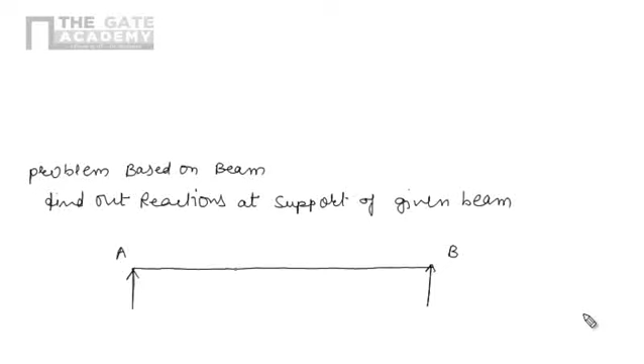In the problem, a simply supported beam AB is given, where at A and B we are having two simple supports, and it is subjected to a uniformly distributed load over a length of 2 meters, with an intensity of 500 Newton per meter, and we are having 2 point loads. The values of these 2 point loads are 500 Newton and 1000 Newton, and this distance is 2 meter, and this distance is also 2 meter.

So let's take this point as C and this point as D. Now we are interested in reactions at A and B.

Before starting this problem for finding out reaction, first identify the supports. Support at A and B, if we look at the diagram, are simple supports, and according to our theory, a simple support has only one reaction. So for this problem, there will be one reaction in the vertical direction at each, which we call Ra at A and Rb at B. So now our interest is to find Ra and Rb.

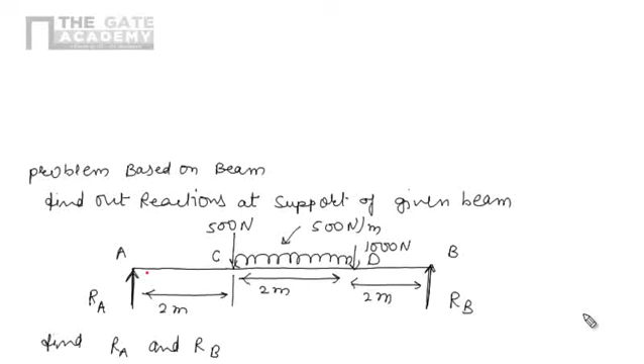If we look at this system, the beam is carrying a uniformly distributed load as well as point loads, and it is in equilibrium, so we can apply the conditions of equilibrium.

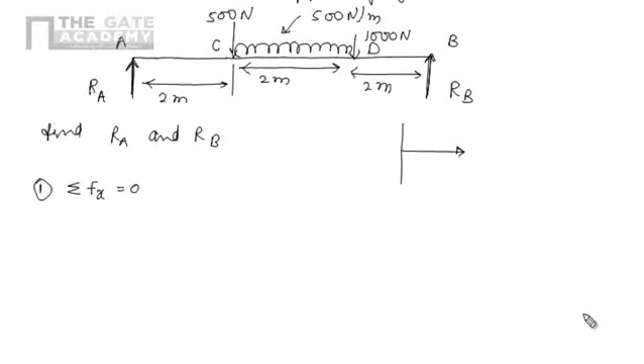The first condition of equilibrium is that the algebraic summation of all horizontal forces should be zero. According to our sign convention, positive x is positive, negative x is negative, positive y is positive, and negative y is negative. At A there are no horizontal forces, at C, D and B there are no horizontal forces, so there is no need of applying the first equation.

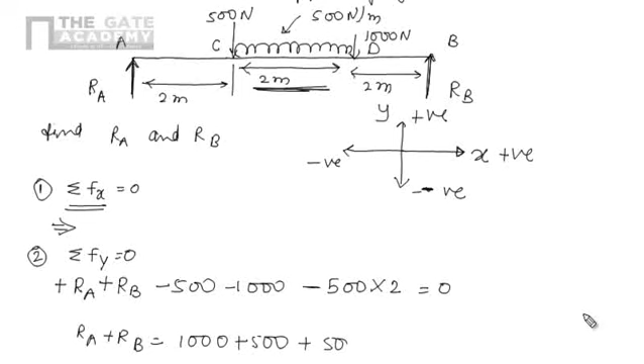Second equation: algebraic summation of all vertical forces should be 0. In vertical direction we have Ra in positive direction, Rb also in positive y direction, a 500 Newton point load downward so minus 500, a 1000 Newton point load downward so minus 1000, and a uniformly distributed load of intensity 500 Newton per meter over a span of 2 meters, acting downward, so negative. This gives Ra plus Rb equals 1000 plus 500 plus 500 into 2, so Ra plus Rb equals 2500.

So we are having two unknowns, and one more equation is needed. We can use condition number 3: algebraic summation of moments of all forces about A should be 0.

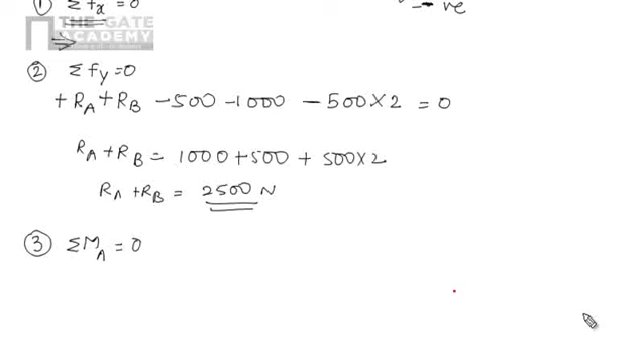Due to Ra, the moment at A will be 0 because the perpendicular distance is 0, so Ra into 0. For the 500 Newton load, the perpendicular distance is 2 meters, so the moment is 500 into 2. Since we are dealing with a vector quantity, our sign convention is that clockwise moment is positive and anti-clockwise moment is negative. This 500 Newton load causes a clockwise moment, so it is 500 into 2, positive.

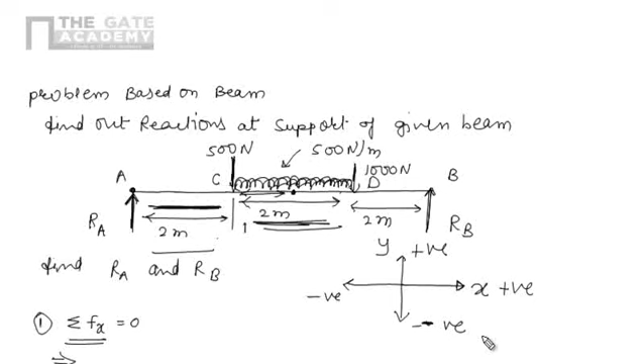Similarly, for the 1000 Newton point load, the distance is 2 plus 2, that is 4, so it is 1000 into 4, again clockwise so positive. For the uniformly distributed load, the total loading is 500 into 2, and it acts at the center of gravity. The distance from C to this CG is 1 meter, so the total distance from A is 1 plus 2, that is 3. So it is 3, and again the moment is clockwise, so positive, equals to 0.

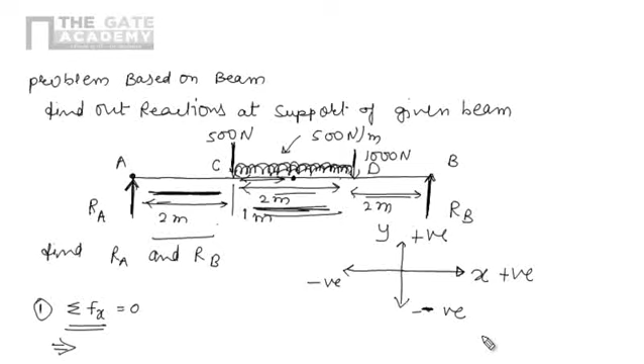And one more moment we have to see, that is due to RB. RB into 2 plus 2 plus 2, that is 6. So we can take this RB into 6.

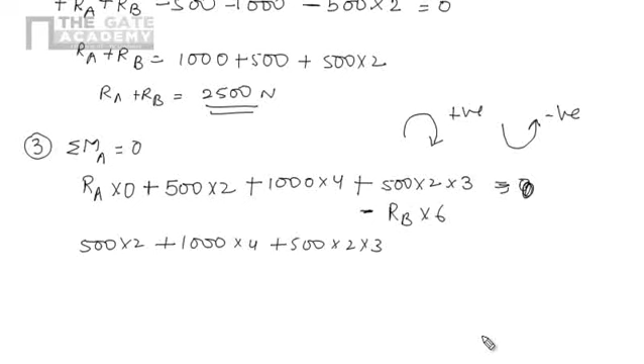RB into 6 is in clockwise direction, and now we have to equate it with zero. So now again I am writing this equation: 500 into 2 plus 1000 into 4 plus 500 into 2 into 3. These are clockwise moments, and this anti-clockwise moment due to RB into 6 equals to zero.

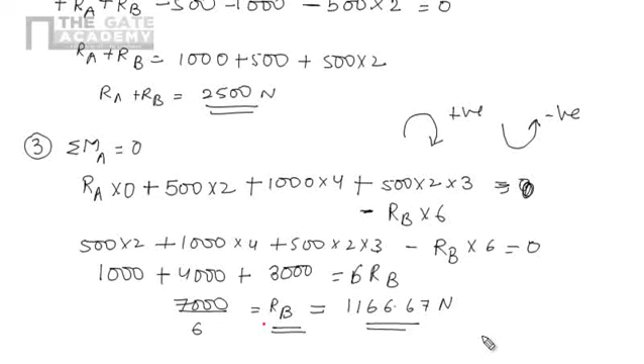So now that is 1000, that is 4000, that is 3000, and equals to 6 RB. So 7000 divided by 6 equals to RB. So RB will be 1166.67 Newton.

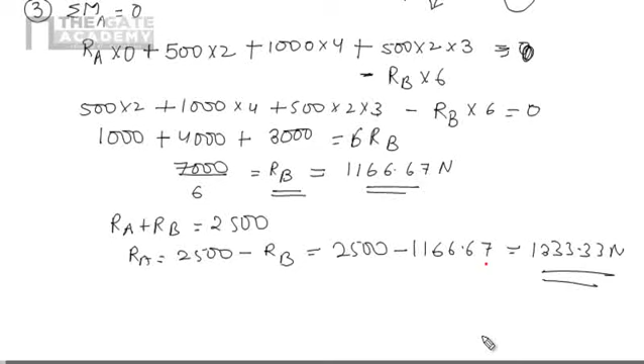So by this way we can find out the value of RB, and we know RA plus RB equals to 2500. So RA will be 2500 minus RB. So 2500 minus 1166.67 equals to 1333.33 Newton. So by this way we can easily find out the reaction at the surface.

Let's take another problem.

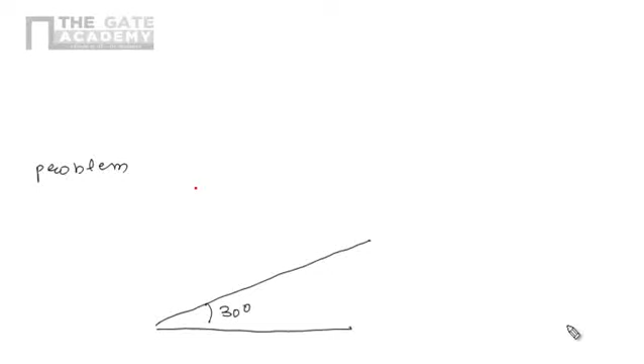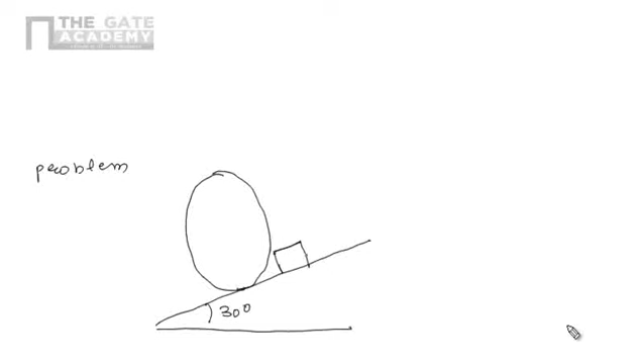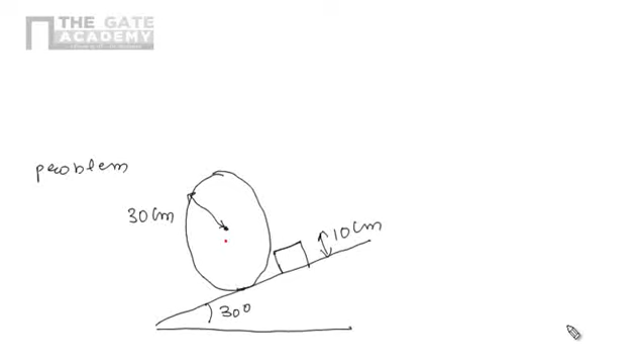Here we are having an inclined plane which is making an angle of 30 degrees with the horizontal, and we are having a cylinder which is resting on this plane, and we are having an obstacle of height 10 centimeters. The radius of this cylinder is given, that is 30 centimeters, and the weight of the cylinder is also given, that is 100 Newton. Now we are applying the force P parallel to the plane.

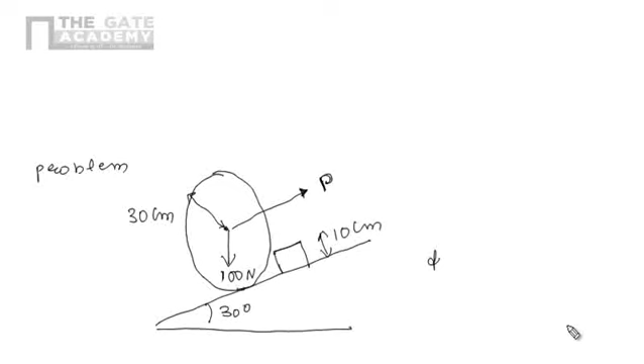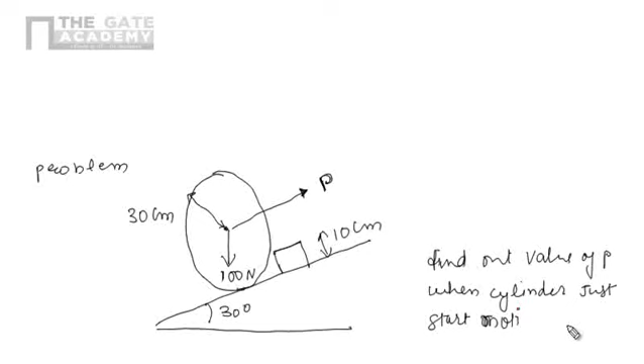Now we have to find out the value of P when the cylinder just starts motion over the block. So we are interested in the value of P such that this cylinder will just start motion over this obstacle. So just start motion means it is in limiting case, means it is in limiting equilibrium.

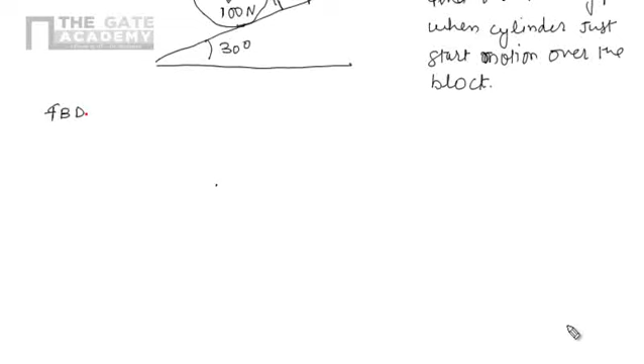So we can apply the condition of equilibrium for solving this problem. So first draw the free body diagram for this thing. If we draw the free body diagram for this case, we are having three forces. So let's draw the free body diagram of the cylinder. We have to isolate this cylinder from the other surface.

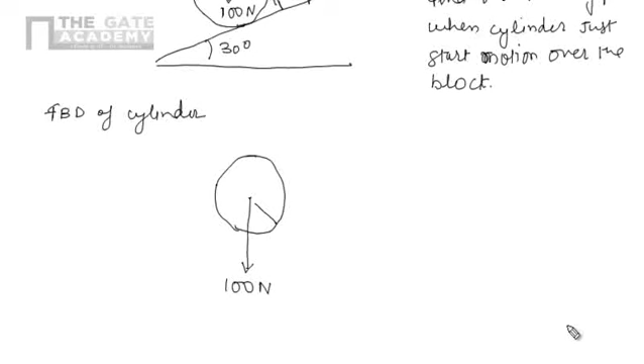One is the weight which is acting in the downward direction. Second, that is the reaction at the obstacle, it's coming like that. And the third one, that is the force P, which is parallel to the plane.

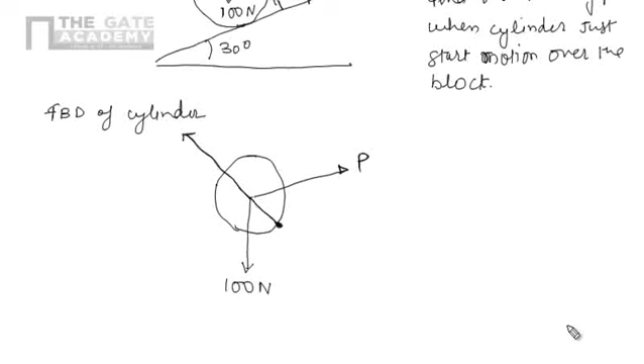And this one is, suppose if we see here, this obstacle, suppose the point is A. So here we can also note this point is A. So now we are having the three forces: the reaction, the force P, and 100. And now we have to find out the value of P.

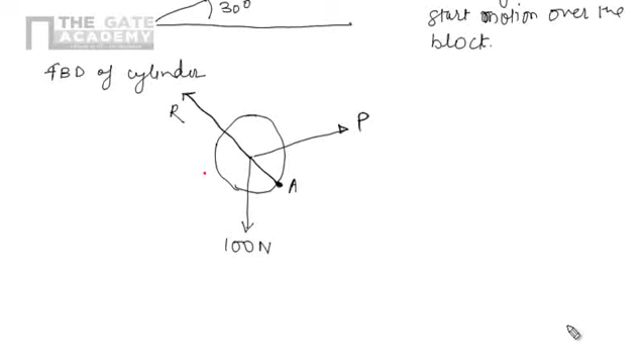So first of all, we are interested in this distance. Suppose if we talk about here, then if we see this one is the distance, we can say that it is 30 centimeters. This is the radius, and this distance, if we talk about this thing here.

And if we talk about this distance, this is again 30 centimeters this distance. And if we draw the line, this is 10, so this will be the 20 centimeter. If we talk about this distance, so by Pythagoras theorem, we can find out this distance will be the square root of 30 square minus 20 square.

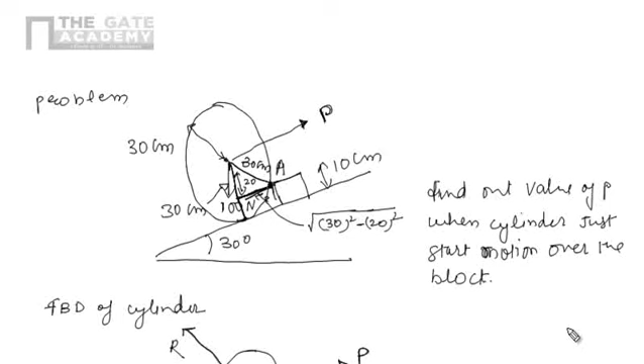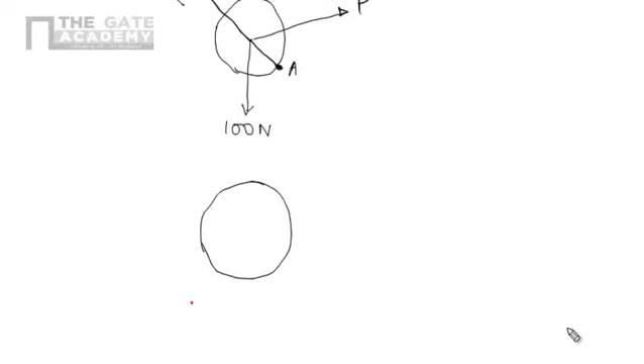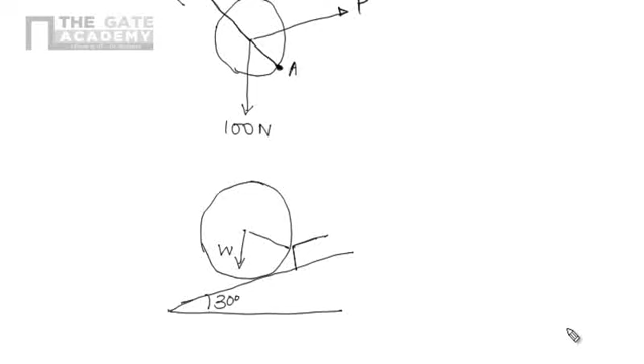So now let's draw this diagram again. Here we are drawing the diagram again. We are having this plane, it is 30 degrees. We are having the weight, it is W. Here we are having the obstacle. Here the reaction, and this parallel force P.

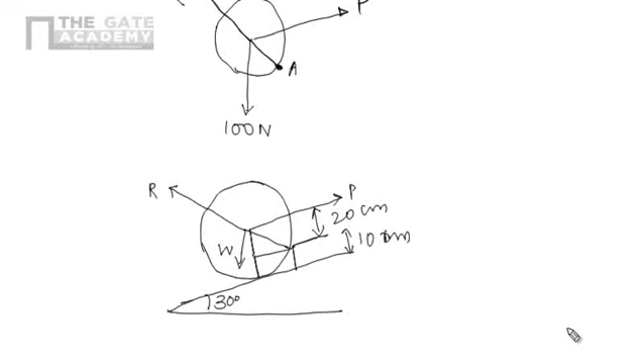This distance is 10, so this distance will be around 20 centimeters, because this one is the 30, and we know this distance is the square root of 30 square minus 20 square. So now we have a better picture of the distance. So that is suppose point A. So point A, this P, the line of action of this P is 20 centimeters.

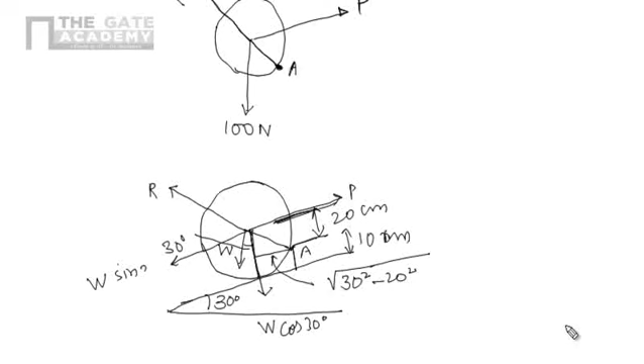And from this W, we are having two components. This angle is 30 degrees, this angle is 30 degrees. So we are having two components, one in that direction and one in that direction, that is W cos 30, and this one is W sin 30 degrees. So now we can easily see what are the different forces coming here. So let's again draw the force diagram.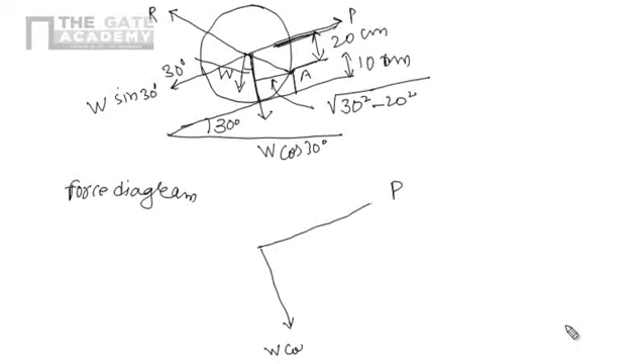So by the force diagram, we have one force P. Here we have the force W cos 30, we have the force W sin 30, and we have one more force called reaction R, and that is at point A.

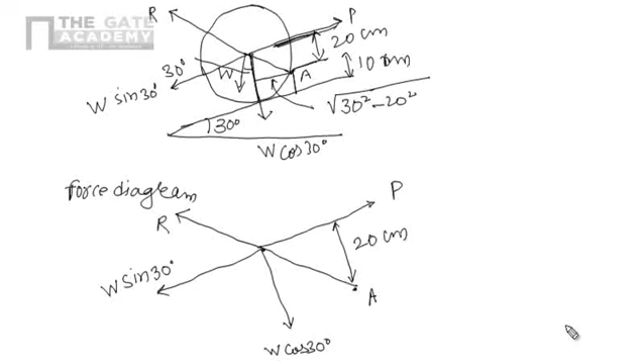So now we are interested in point force P. If we see the perpendicular distance between A and P, we can easily see that is 20 centimeter, and this distance we can easily say is square root of 30 square minus 20 square.

Let's take condition number 3: algebraic summation of moments of all the forces about A should be 0. So R is passing through A, so due to R, moment at A will be 0.

Due to this W cos 30, the perpendicular distance is square root of 30 square minus 20 square. The nature is in anti-clockwise direction, so negative. Our sign convention: clockwise positive, anti-clockwise negative.

Similarly, due to this P, the perpendicular distance is 20, so P into 20, and it is in clockwise direction, so positive. Due to this W sin 30, the perpendicular distance is again 20, but it is in anti-clockwise direction, so it is negative, equals to 0.

So now we are having W cos 30 into square root of 30 square minus 20 square equals to P minus W sin 30 into 20.

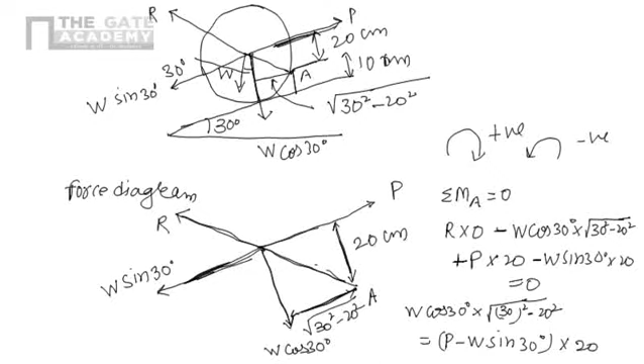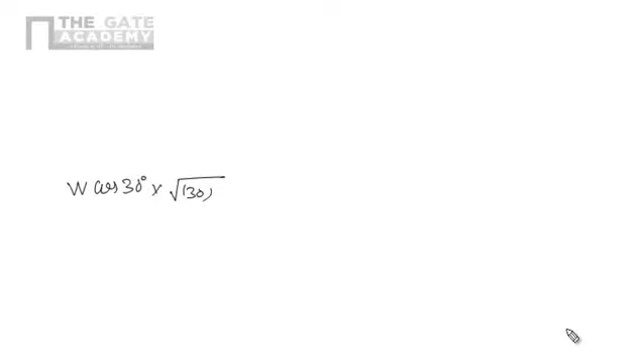So I am writing again the equation: W cos 30 into square root of 30 square minus 20 square equals to P minus W sin 30 into 20.

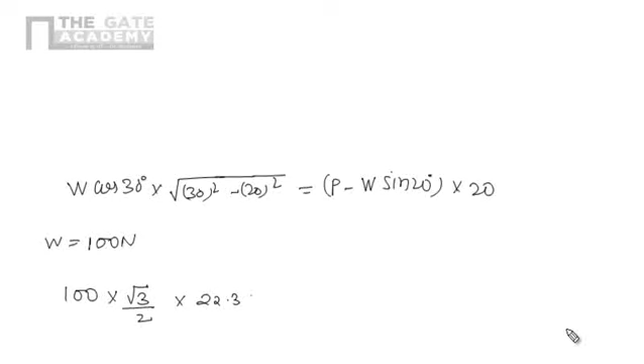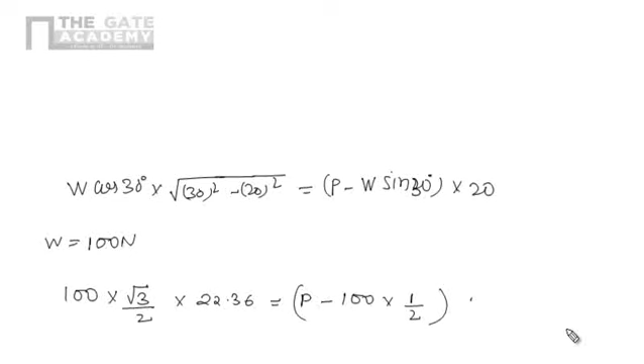We are having the value of W given, that is 100 Newton. So 100 cos 30 is root 3 by 2 into 22.36 equals to P minus 100 sin 30 degree. So it will be 1 by 2 into 20. That gives 1936 equals to 20P minus 1000.

So P will be 936 by 20. So this value will be 46.8. This is the required value.

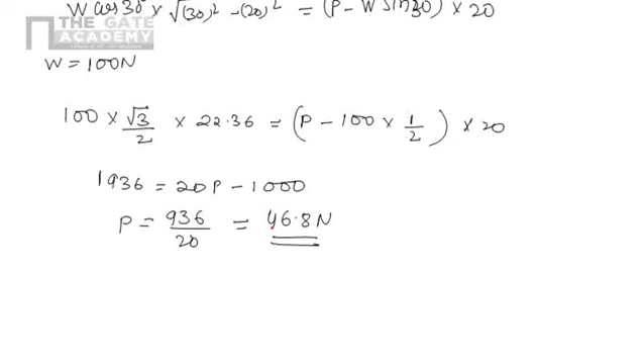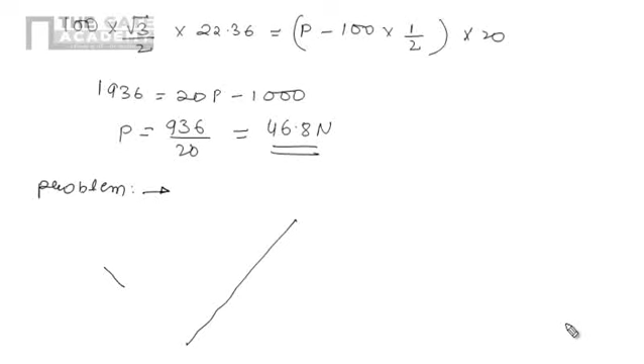Let's take another problem. There are two prismatic bars PQ and RS given in the problem, and P is attached with the wall with the help of a hinge support, and the weight of each bar is 150 Newton.

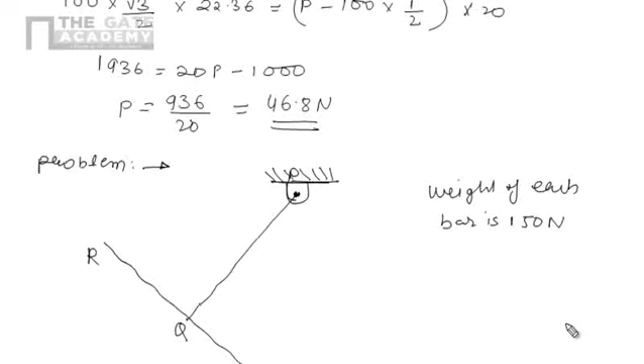Now at point S, a 200 Newton load is there. Now we have to find out the value of theta. So our interest is to find theta.

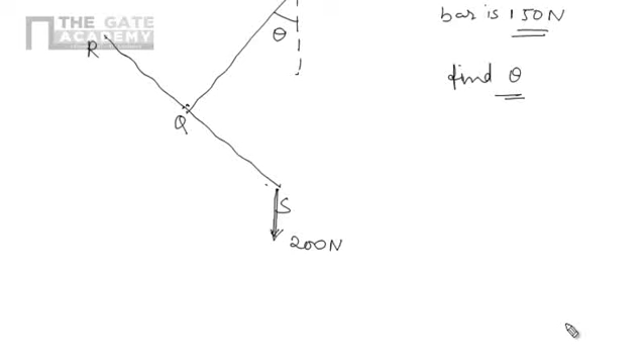So if you see, there are two prismatic bars PQ and RS which are welded together, and the weight of each bar is 150 Newton, and here we are applying a load of 200 Newton. So now we have to find out that by the application of 200 Newton, it will rotate about the hinge and make an angle theta.

And after making the angle theta, it will be in rest. So now we have to find out the value of theta. If you see this problem, we can easily say it is in equilibrium, so we can apply the conditions of equilibrium here, and we are only interested in the value of theta, meaning we have only one unknown theta. So by directly one equation we can solve the problem.

So before starting the problem, let's see where this load of 150 will act. 150 is the weight of each bar, so it will act at the center of gravity, that is 150 Newton. Here for RS the center of gravity is there, so it will be 150 Newton.

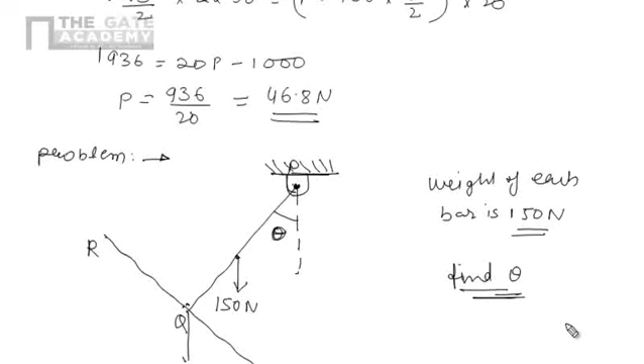And let's take PQ equal to RS equals to 2L. So this one will be L, this one will be L, this one will be L, and this one will be L.

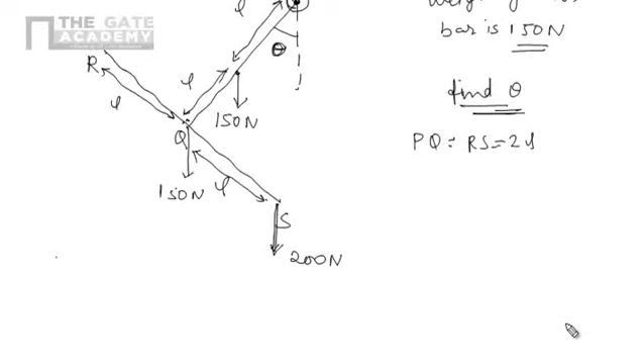So now we can easily apply the condition of equilibrium: algebraic summation of moments of all forces about P should be 0. The reaction at point P will produce zero moment at P because the perpendicular distance is 0. Now we will find the moment due to 150 Newton at point P.

So we are interested in this perpendicular distance. It is nothing but L sin theta. So now we have 150 into L sin theta.

The nature of this moment is in the anti-clockwise direction, so according to our sign convention, it is negative. Moment due to this 150 Newton at point P, we have to consider this perpendicular distance, which is nothing but L sine theta, 2L sine theta. So now we are having 150 into 2L sine theta, and again it is in anti-clockwise direction, so it is negative.

Due to this S, we are having moment in the clockwise direction. So due to this S, we have to consider this 200 Newton.

Now we have to consider the perpendicular distance between these two. Actually it is somehow away from this. If you take this thing, we have to take this distance. This angle is again theta. So this one will be L sine theta, L cos theta, and this full distance will be 2L sine theta. So now the total distance between these two will be L cos theta minus 2L sine theta. And the moment is in clockwise direction, so it is positive, and it should be zero.

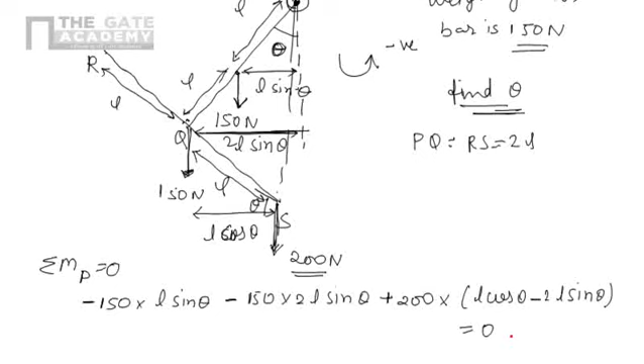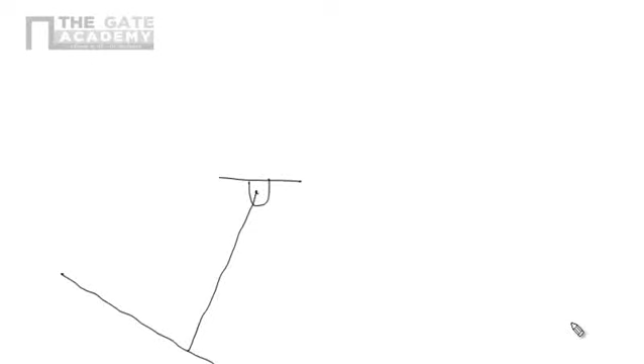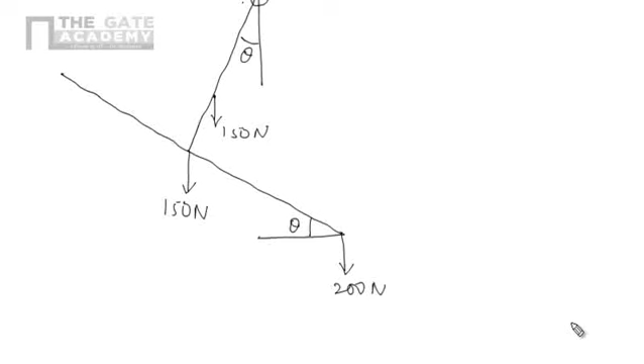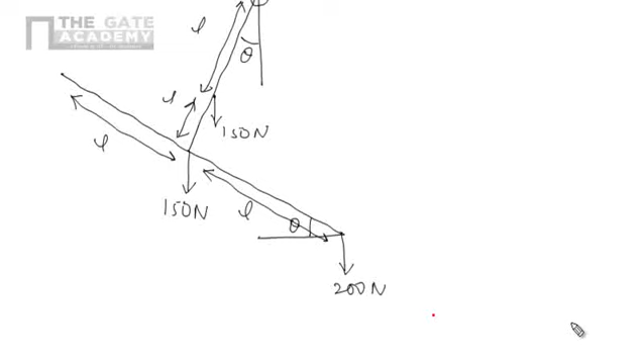Okay, again I will draw the diagram and show all the forces and perpendicular distances clearly, it will be very good for you. This is our bar, and this angle is theta. Here we are having 150 Newton, here again 150 Newton, and here we are having 200 Newton, and here we are having the angle theta. Now we know this distance is L, this distance is L, this distance is L, and this distance is L.

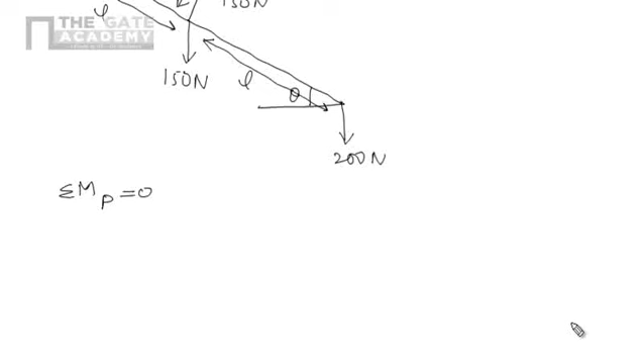Now we are interested in the algebraic summation of moments of all the forces about point P, which should be 0. The reaction at P is passing through the point P, so moment due to reaction at P at point P will be 0, so we are not considering this thing.

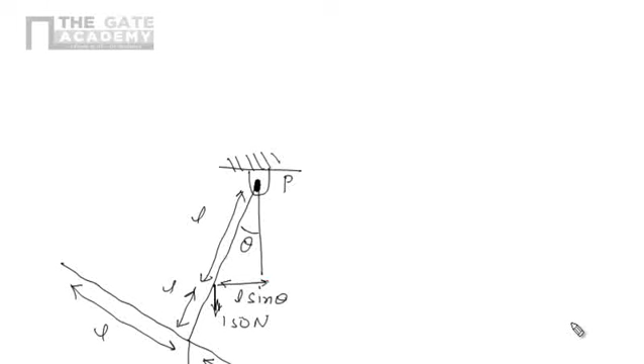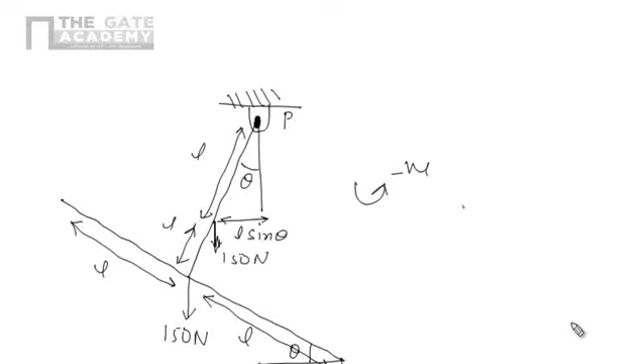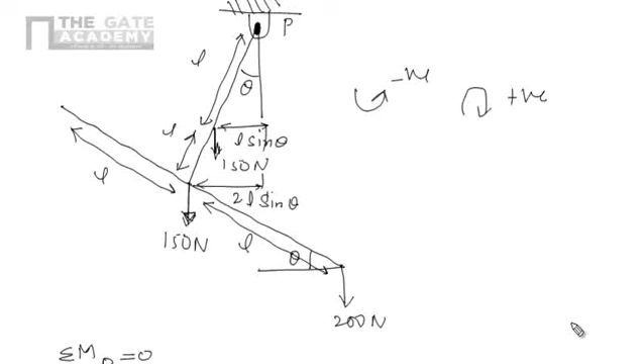Moment due to this 150, the perpendicular distance we have to find out, is nothing but L sine theta. So moment due to this 150 is 150 into L sine theta, and it is in anti-clockwise direction, so anti-clockwise is negative and clockwise is positive, so we have to assign negative. Similarly, due to this other 150 Newton, the perpendicular distance will be 2L sine theta. So 150 into 2L sine theta, and again it is in anti-clockwise direction, so negative.

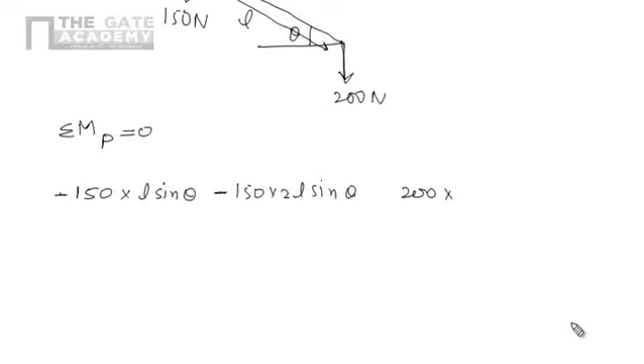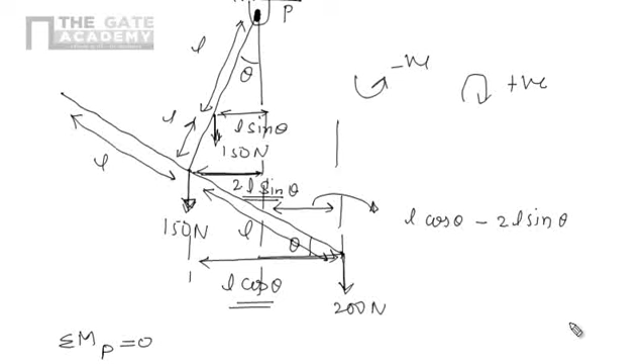Moment due to this 200 Newton is 200 into the perpendicular distance we have to see. This is the line of action of this force, we want this distance. We know this is 2L sine theta here, and by this way also we can see that this one is L cos theta. If we subtract 2L sine theta from L cos theta, we get this distance, which is nothing but L cos theta minus 2L sine theta. And it is in clockwise direction, so it is positive.

It equals to 0. I believe that now it's very clear to you because I drew a big picture here, and with the help of this it is very clear. Now we can easily simplify this thing. L we can cancel out. So here we are having 150 sine theta plus that is 300 sine theta equals to, or we can minus it, 200 cos theta minus 2 sine theta equals to 0.

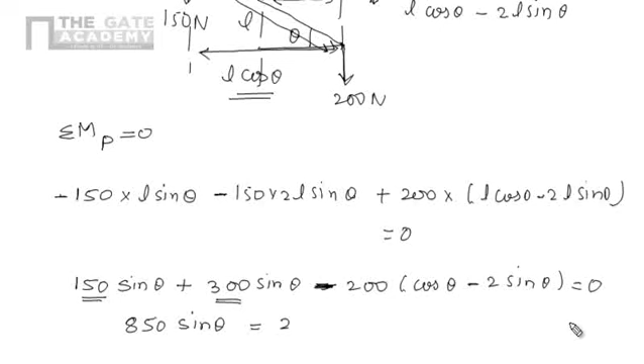If we solve this thing, we are having 850 sine theta, because here 150, 300, and that is 400, so 4, 5, 6, 7, and plus 700 plus 150 which is 850, equals to 200 cos theta. So tan theta will be 200 by 850, so we are having 0.23529. So theta will be tan inverse of 0.23529, so theta will be 13.24 degrees.

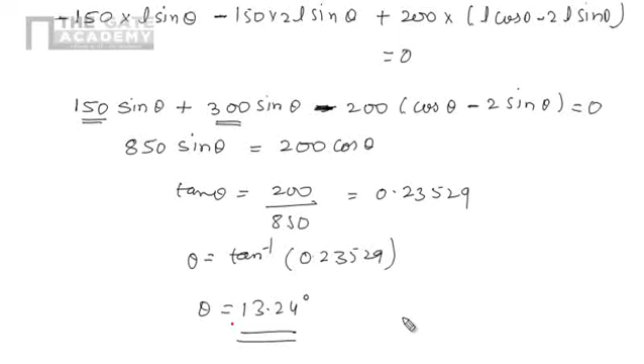So by this way we can easily get the value of theta by applying only one equation, that is the algebraic summation of moments of all the forces about any point should be 0. So if we talk about all the examples we already discussed, whenever we required only one equation, by directly using the moment equation we can directly find it.